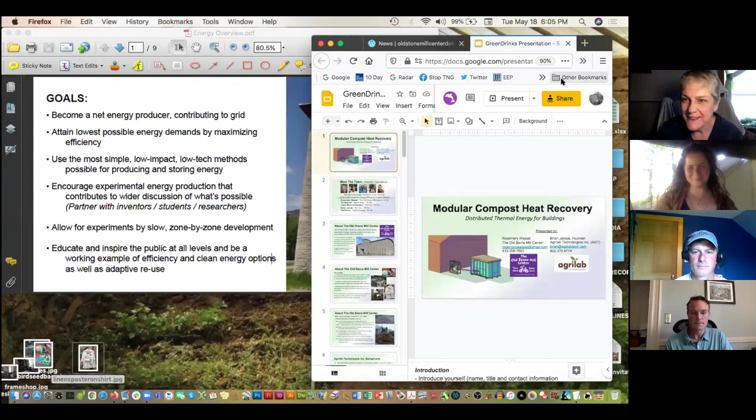Okay, thanks. Oh, I got to get to the right screen before I start. So share screen. I like the saying that activism is the rent that we pay to live on the planet. I think of that every once in a while. If I think it's all too much, I remember how much it matters. All right, I hit the wrong button again. Let's see if I can scoot over enough to do this. Done and present. There we go.

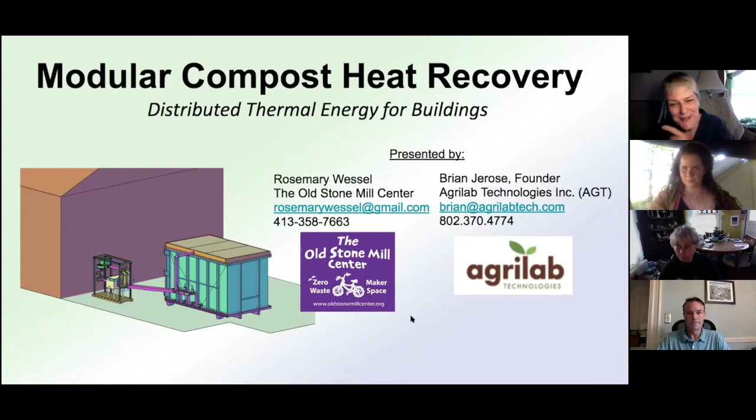So thanks everyone for coming. This is a really exciting project we've been working on developing for a few years. It's a modular compost heat recovery, distributed thermal energy for buildings. And we're working on this with Agrilab and also Alpine Solar and also Ted's company, whose name I can't remember off the top of my head. Capital Energy, thank you.

So I'm the clean energy coordinator for the Old Stone Mill. It's a building in Adams, and Stu Besnoff from Alpine Solar and Jason McCune and Brian Jerose are from Agrilab, which is a company in Vermont that normally works with farms and other similar agricultural businesses. And then Ted Butler, who works on investment in clean energy. I see, there we go.

So about the Old Stone Mill Center. Old Stone Mill Center is a zero waste makerspace in Adams, and it's dedicated to taking industrial surplus and upcycling it into usable, durable items of all sorts. It's a historic mill building. If you've ever driven up Route 8, I'm sure you've noticed it just before you get into the center of town. Caught my eye for years when I was driving by.

And then one day my friends Mike Augsburger and Lenny Freed said, "Oh, we bought a mill building in Adams." I said, "Is it that really beautiful one?" They said, "Yes, it is." So it's originally from 1860 and has been a woolen mill and a wallpaper factory during its time.

The programs that they're working on right now are diverting thousands of pounds. Actually, I think it's measured in tons of sheets, blankets, chef's shirts, and other cast-off linens from Aladco, which is a company right down the street from them. A lot of it goes to homeless shelters. It goes to other agencies. It gets distributed wherever it can be used.

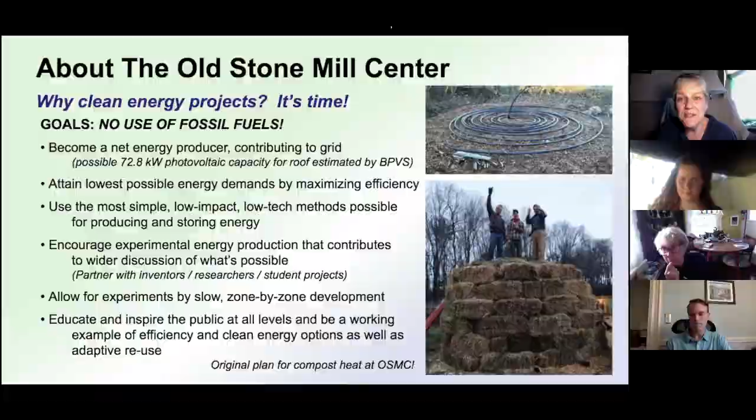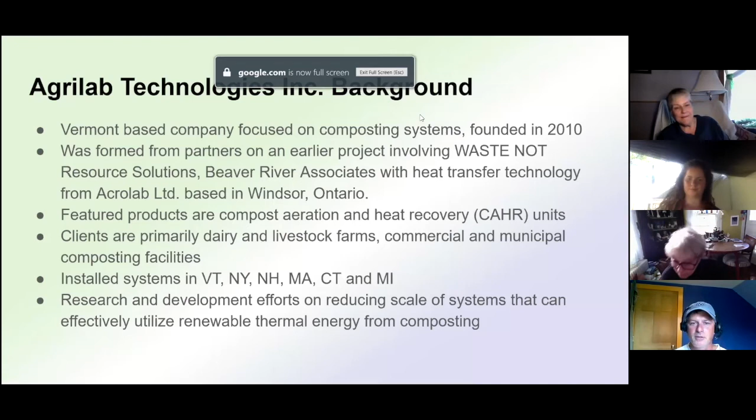So the next slides will go through some background of how we got to this point, and then get into where we're hoping to go specifically with the Old Stone Mill Center and some other partners. So as Rose mentioned, I'll move my Zoom screen out of the way so I can see better.

We're based in Vermont, northern Vermont specifically, and myself and other folks have been working in composting on farms and with other commercial businesses for a number of years, but was fascinated by how much energy and heat comes off of a big active compost pile.

So ultimately, after a few projects, we found some partners who had done more with this, some of them with the Jean-Pain mound, some with aeration systems, and had a project near where I live in Sheldon, right near Enosburg Falls, Vermont, just a few miles from the Quebec border, and brought in this group Acrolab from Windsor, Ontario, that had a heat transfer technology from compost. So we've been working on it for, hard to believe, close to 20 years now in some shape or form.

But what we've developed into a company is really we're registered as a farm equipment manufacturer, but we do a lot of other consulting and services around putting these projects together, a lot of the planning and development and then helping people install and operate these units. But we've come up with the term compost aeration and heat recovery.

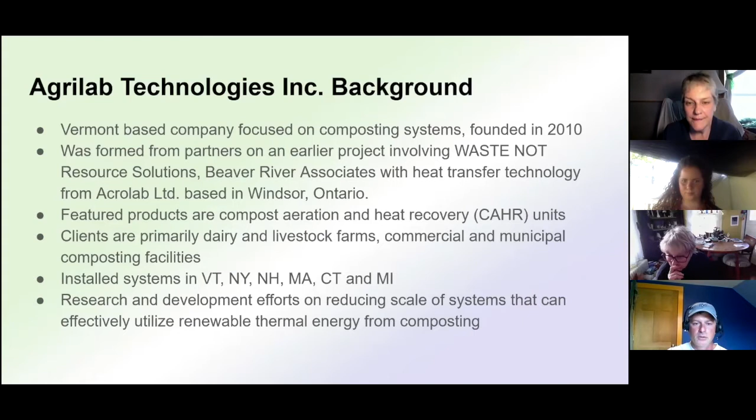But we've always been interested and had a lot of at least inquiries for people to do heat recovery from compost at different scales, whether it's horse farms or homesteaders, and then ultimately the Old Stone Mill Center. So it's something that we've looked at over the years, trying to figure out how to downsize this to make it economical at different scales. So we were thrilled to have the opportunity to work with their team and start exploring this more seriously.

Just some quick images to show, again, the scale that we're often working at is much larger. This is a farm, Catlin Farmstead in Winchendon, Mass. That's our equipment that we brought down and basically has a big aeration blower that puts that suction or negative aeration on a pile. And we're dealing with batches that are often 100 tons or 180 or 200 cubic yards of volume at a time. And there would be 4 or more of those.

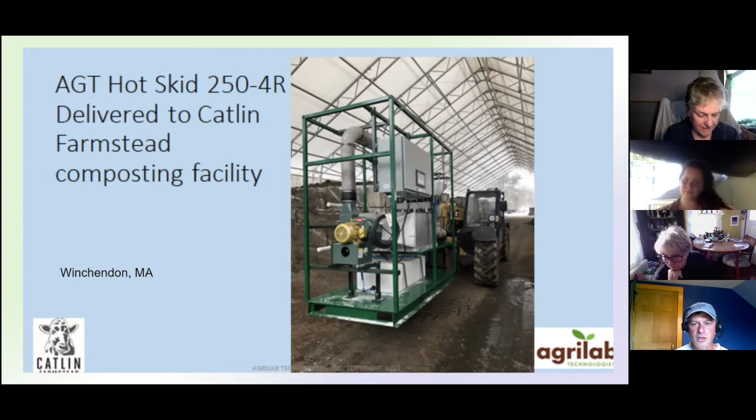So some of these sites are producing as much as 10,000, or the one in Michigan, over 30,000 cubic yards of product a year. So at those scales, there's a lot of heat. So it's a little easier to glean off large volumes of energy.

I like this picture to show an example of an installed system. It doesn't really show our equipment other than the pipes that lead into it, but there's 5 or so piles that you can see, but under the snow, there's these 8 rows on a composting pad with aeration trenches, and then pipes go underground. But the point being is, even with a snow cover in February of 2020, at the shell of the pile, the inside of the pile was 150 degrees.

So we were able, through insulated pipes, to be drawing that vapor in. It helps speed up the composting process by giving it more regular oxygen, helps avoid odors that can happen when they, again, run out of oxygen, and pull all that hot, steamy vapor over the specialized heat exchangers and heat up a water loop. And at that site, it heats up their shop and sales building's floor.

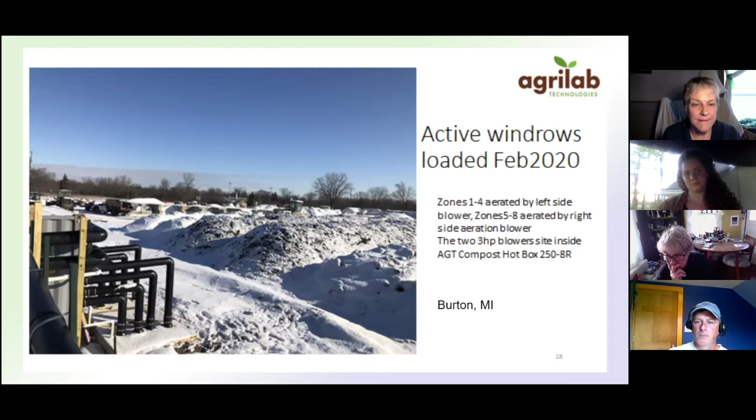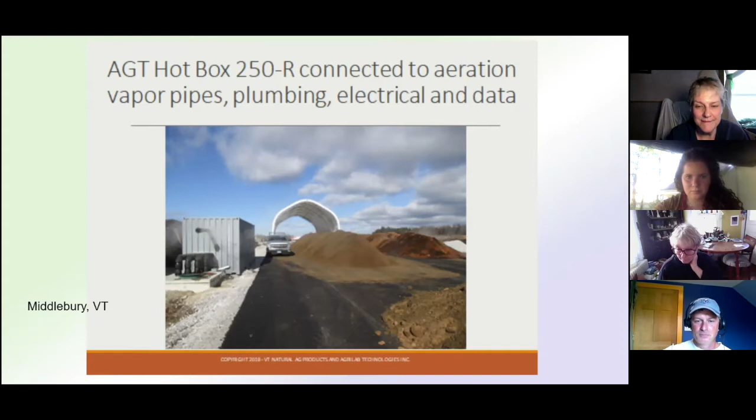So some of their product that's finished but a little damp, they can dry it down before running it through a screener to sift out the fine and coarse particles, as well as to make it dry and stable before they put it in bags and send it to garden centers and so forth. So again, just to give the context, we're often dealing at larger scales with bigger facilities, but thus the challenge.

The next couple slides, just talking about some of the other members that we brought in to the team. So us being in Vermont, 3 to 4 hours away from Adams, Rose and Lenny and Mike suggested to get in touch with Stu Besnoff, who's an experienced solar installer and service technician, and has a lot of experience with the hands-on of connecting not only the electrical and mechanical systems, but plumbing to get the solar thermal out of the system.

And he provided us with confidence that we wouldn't be asking Lenny to wake up in the middle of the night and flick a switch or drain a pump, I'm teasing a little bit, but basically that we have some additional mechanical support on our team, both to make sure it can run reliably, but also to document the system in terms of what's the level of maintenance that would be required to routinely service this if this was to be done at a number of sites.

But also a lot of insights into deploying renewable energy systems in general.

Ted Butler was another individual we found through a little searching, and was another way to round out our team. Ted has a lot of construction project management experience working on big institutional and commercial construction projects, but also looking at the economics of these renewable energy systems and creative ways to finance them, so these facilities can make it a little easier, knocking down some barriers to implementation. He's also part of that network of Greentown Labs, a lot of innovative energy related companies in Somerville, Mass.

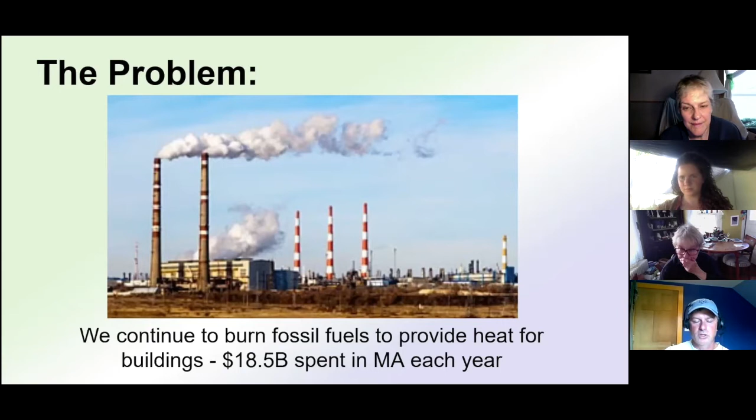So there's a huge market opportunity for alternative heating, even just in Massachusetts alone, not to mention nationally and globally. All of us were motivated more than just by the business opportunity, but by the climate crisis, and we've got to find better ways, even if we don't know exactly how we're going to get from point A to point B. We all know we need to work on it. So this was another opportunity to work towards solutions.

One of the co-products of that process is the respiration of all those bacteria and fungi, and they turn into a thermophilic process, meaning it's a high temperature decomposition, and 150 degrees is fairly common in a farm or commercial composting facility. That goes back to the motivation for our business, Agrilab Technologies, but it's also an opportunity to deploy at a different scale and a different model.

Again, the opportunity is to displace all that fossil fuel consumption. With a little research, there's at least 5 million tons of organic materials, defining organic materials as leaves, wood chips, food scraps, manure, and there's likely more. That was just through some of the open source references we were able to find. So there's an abundant amount of this material, some of it already being composted, some burned, some chipped and left along roadsides when people clear power lines or road edges.

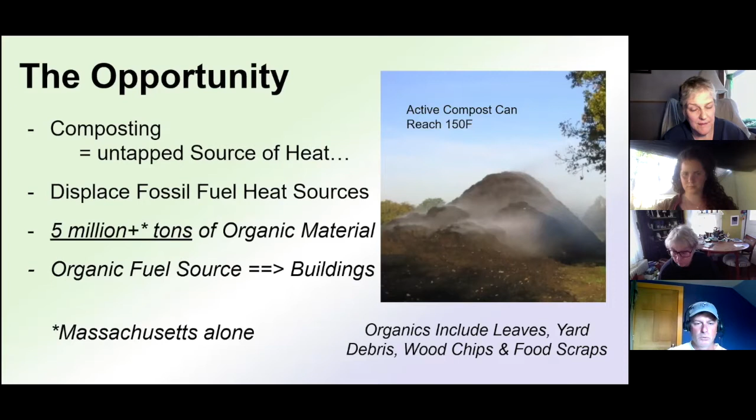So what we proposed was to modify our compost aeration heat recovery approach, but instead of doing it on large 100-ton or 200 cubic yard windrows, we'd put it in a modified roll-off container, thus the name the Hot Roller, and do aeration in an in-vessel unit inside that container. We could potentially load it with hot compost and not have to do all that blending and material handling at the Old Stone Mill Center, but instead do it at another facility and then bring the already heating compost to the point where there's that thermal load or heat demand.

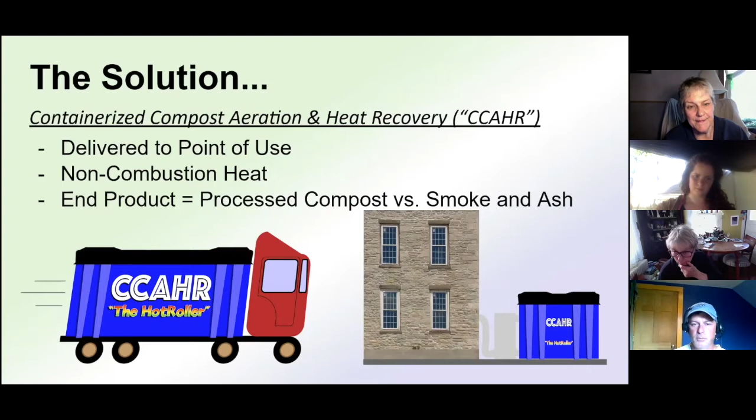Eventually it goes through its most rapid decomposition stage. Curing is where it starts to cool down and you start to get more fungal development, for people who are interested in building soil and healthy, beneficial microbes for their gardens or other applications. Then that finished product could go out in bulk or bagged or other ways.

So we're trying to basically divert some of that material that's already being processed at, I think there's at least 70 or 80 facilities around Massachusetts and hundreds around the region, thousands around the country that are registered, much less other farm compost sites that aren't even in official databases.

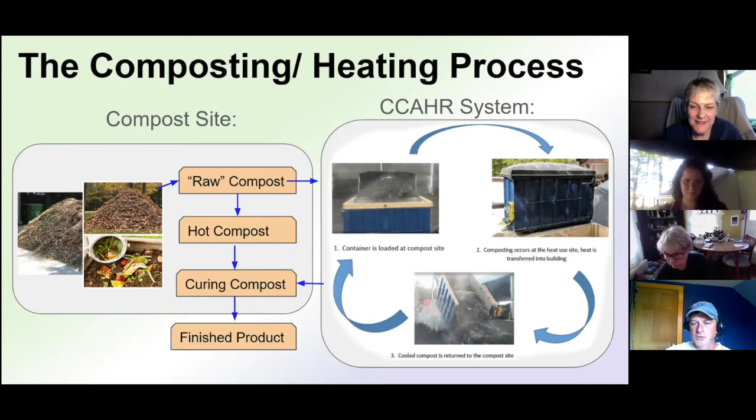A little more zooming in on how it works. The container on the right is the hot roller, or that containerized compost aeration and heat recovery unit. We have a mechanical unit that has a blower, a heat exchanger, a circulator pump, and a control panel and condensate collection. That's the mechanical skid or frame that's set to the side of the box.

Through the connection of about 4 different pipes, we're able to either push air into the bottom or pull air down from the top. Even though that compost is not being turned or agitated, we're able to push and pull air from different directions so we can evenly compost that mix of biodegradable materials and not get any dead spots or uneven pockets of compost. That was one of the technical challenges for making this work, as well as any leachate or condensate that forms at the bottom of the container — being able to capture that, irrigate it at times back to re-wet the surface, or have it be sent to another appropriate location.

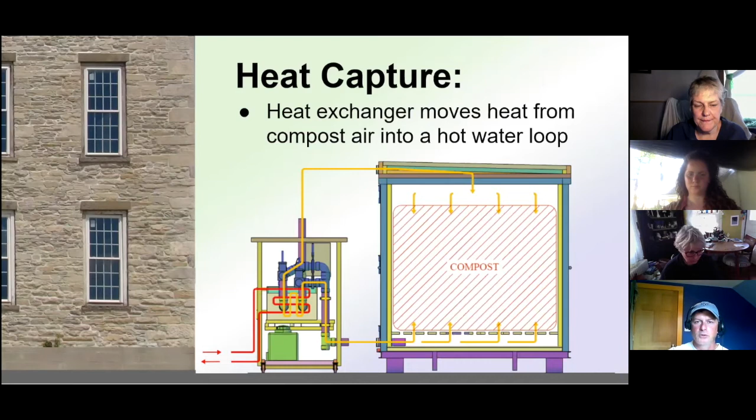Again, the whole process is dependent on having it be successfully composted. If the oxygen runs out, suddenly there's a stinky box of food scraps and compost outside of the building. So that's key to the success of this — making sure it's a successful composting system that's not creating nuisances, and makes a product that someone's going to want to use for soil improvement. But we have ways of shutting off the air to circulate the heat and keep it warmer than we expected. We got temperatures in the vessel up to 160 degrees.

We occasionally monitor the oxygen levels. At times when it gets down below 5%, there'd be a sensor that would open up a valve and be able to pull in fresh air for a while to bring oxygen levels up to 10% or greater. The term biofiltered exhaust refers to that steamy vapor that comes out the end of the system. We can direct that into basically a box or a bin of wood chips.

The premise is some of the odors are largely ammonia, nitrogen-based compounds. So if you push that vapor into a carbon-rich bed of wood chips or similar material, that is effective at reducing or eliminating the odors. We did this — I'll visit that later some more — but that's a common practice on a large scale, and we basically modified it to a smaller scale.

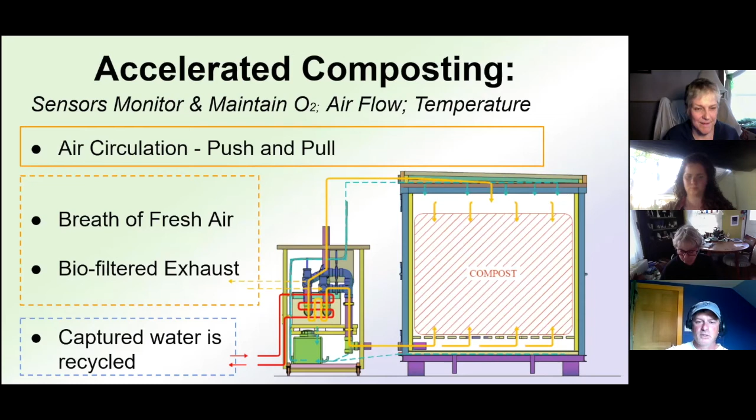It's important that this isn't dripping or leaking on the ground, so we have to have a system that captures the water generated through the process. So what did we do? Here's trying to make this from an interesting idea into a product that people will actually want to use.

With the investment of the Old Stone Mill Center and another group out of Iowa, Fair Carbon Exchange, and then some of our own time and labor, we fabricated some of this equipment at our shop in Cambridge, Vermont, which is northern Vermont.

Essentially what we call the proof of concept. It's a test that it works as we designed, and we did a series of test runs, and then iterative improvements on different things like the gaskets, the pumps, the blowers, some of the control systems.

Then pilot is what we're proposing, and what that's the intent of what we'd like to do is have this ready for prime time, or basically ready for bringing it to Massachusetts and Adams, and doing this on site and actually heating part of the Old Stone Mill.

So a few more steps. We'd do some more prefabrication at our shop, and then do some demonstration in the field with our team and various partners. And then should this be successful and there's interest from the market, then the next step would be to produce multiple units, set up more of a logistical network, figuring out who would operate the business.

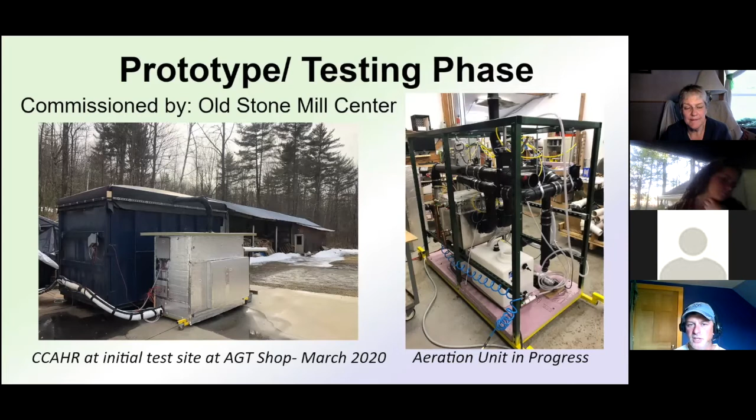The picture on the right is a view inside the shop, showing the mechanical unit as it was being built. That's what's encased inside that silver insulation.

All right, so what's next as we start to wrap up here? Really we're looking for more partners and feedback on how we can get this actually in the field. We have certainly some technical know-how, but I think we still have some business questions in terms of how to deploy this, and then also figure out what the actual challenges are for operating this at any meaningful scale.

A few mechanical updates to some seals to make it more reliable, something that wouldn't need as much hovering over, something that could be checked or serviced on a weekly or bi-weekly basis by Stu or someone else with a mechanical plumbing background, and ultimately pilot this and be able to bring, as part of their educational mission, interested people to check it out and see if this is something other people would be interested in as a source of fossil fuel free energy.

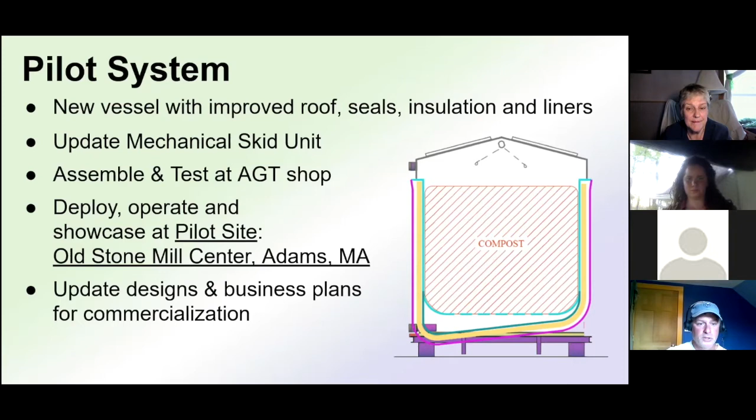Again, stressing that I think a lot of our work is on the business plans for commercialization. We did apply for some funds through the Massachusetts Clean Energy Center. So we had to put together some potential unit cost economics if we were able to get this down to certain costs for building both the mechanical unit as well as that container or containers at a larger facility.

You already have an educational mission, and a lot of colleges have a sustainability mission as well. Municipalities, farms and greenhouses, similar to somewhat what we already work with now, but you could potentially serve smaller farms that aren't large dairies or livestock facilities, and then commercial industrial buildings. But the good news is, again, that market potential is huge on the heat side.

Ed Fitzgerald wants to know, is there a gauge on the unit that indicates when the compost is losing its effectiveness and needs to be replaced? I'd really like to chime in and share my screen at this moment. Jason had a brilliant system of putting sensors in the compost box itself. Let me see if I can pull this up.

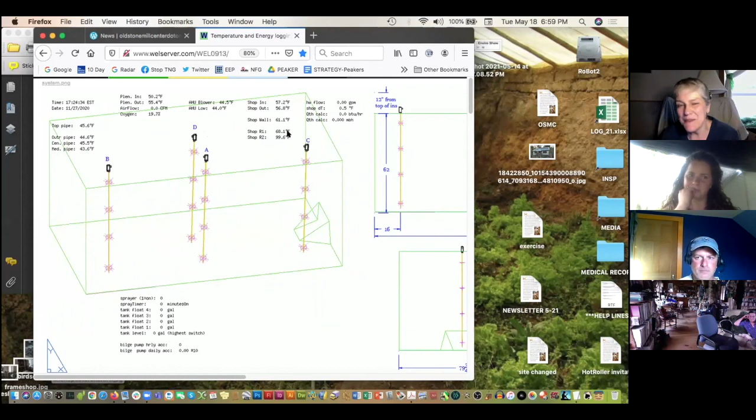This is a readout of those sensors. I don't think there's any compost in there right now, but you can see where 4 sensors were dropped in the center of the compost box itself. It's also taking the temperature of the in and out in the plenum. It's got the in and out from the shop itself, the in and out at the shop wall. So it's this huge system of sensors that he came up with, and I'll let him elaborate.

Yeah, we track temperatures, and with the prototype, basically we want to make sure all the compost gets hot. So that's why we recirculate the air around in a loop. I put all those sensors in there to really check, is there a cold spot in the compost somewhere that we're not actually firing the whole thing.

With that setup we had there, we could look at the graphs and see what was the trend in oxygen over time, what was the trend in temperature, and between the oxygen and the flow rate of the air, we measure the airflow, and we also have the water temperatures and the compost temps. We can do a pretty good job of figuring out where the compost is at. And basically when the temperature drops below what you need, then that would be time to swap it out.

At this point, we're still operating these manually, but certainly you could develop an algorithm that would just send you an email or make an alarm or something that says it's done. But yeah, if it drops below 110 or 100, there's probably a threshold where you would say, okay, time to pull this box and move to the next one. But it's really interesting. There's a lot going on.

I realized when we recirculate the air, we can really pull the heat out of the compost pile. And there were times when we actually cooled it off too much. And then we were like, oh, maybe it's done. But then we'd slow down our heat extraction and it would heat back up again. And so it's interesting.